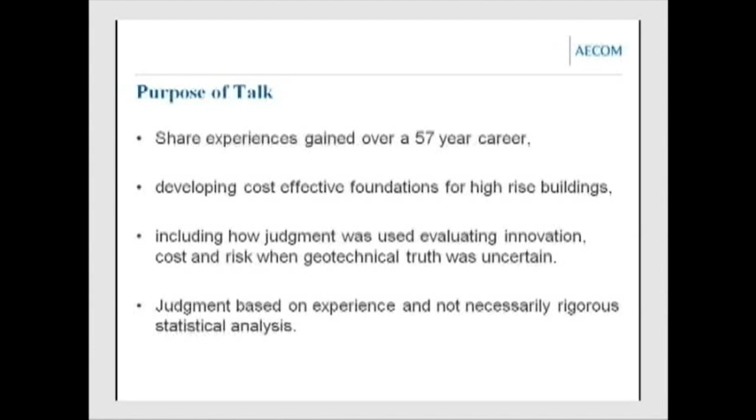Well, there it is. The only thing I could add is the judgment I'm going to talk about is based on experience and not necessarily rigorous statistical analysis. Most of you who know me appreciate that.

The major portion of my career has been spent in Chicago, and the Chicago foundation history has undoubtedly been an influence on my development as a foundation engineer. I followed Ralph Peck in Chicago and gained from Peck's experience greatly, I would say.

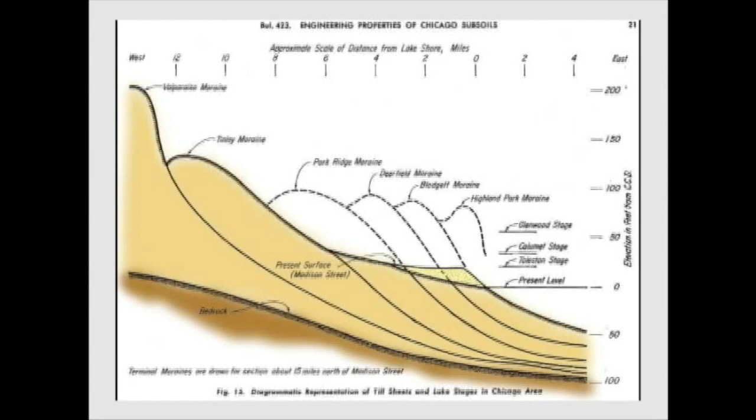I want to give a little background here, because it helps explain me a bit. Chicago is a glaciated area. We've been run over by glaciers over the last 40,000 years, maybe at least 5 times. You can see the different till sheets represented here, close to downtown Chicago. There's a sand layer over these till sheets that increases in strength with depth.

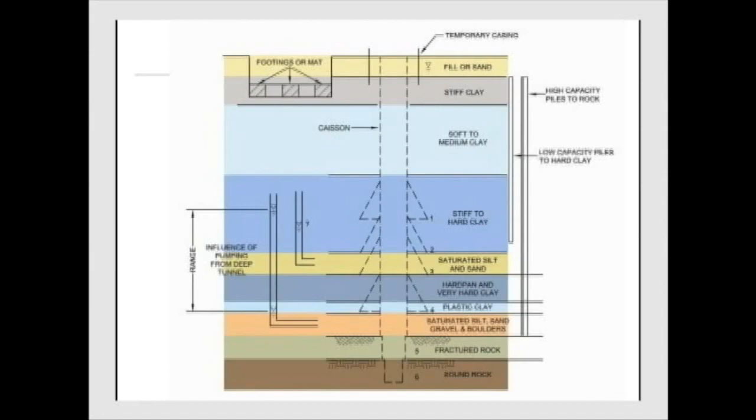Some of our buildings are rather famous for excessive settlement. The auditorium building has settled a maximum of 30 inches, with a maximum differential of 18 inches. It did it gradually enough, and they maintained the cracks, mortared them up and everything, as I understand it, so they kept it safe. But you can notice it when you visit us—you actually step down as you go into the auditorium.

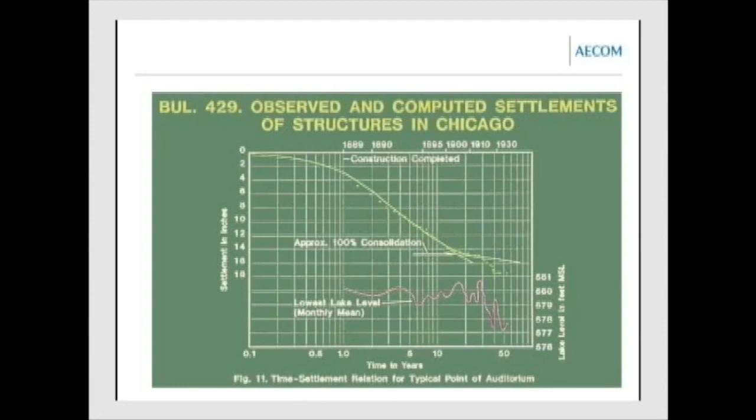This is just showing a typical point, not the worst part, not the 30-inch part, but you can see even over a 50-year period, there's 18 inches of settlement reported at this particular point.

Now, because of this settlement, builders at that time knew from experience it was going to settle. So they built them a little bit higher, 3 inches, 4 inches—I think the maximum height was 9 inches. And of course, 30 inches is a lot more than 9 inches.

General Sooy Smith developed what was called the Chicago caisson method. It involved digging a circular shaft and driving timber lagging sets, then bracing them with circumferential steel rings. You just keep going deeper. When you get down to a hard bearing level, you can enlarge it, and you can call it underreamed or belled, or whatever.

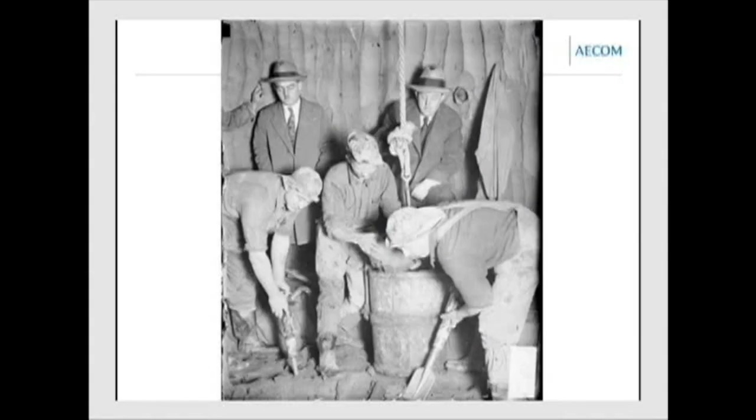Now, I love this picture. This is a picture down on the bottom of one of these hand-dug caissons. It must be a rather sizable bell. You can see the workers—I've ridden up and down the muck bucket there many times with the workers, but I wonder how those guys in the back got up and down, the guys in the suits with the fedoras. To be honest with you, I don't have the answer to that one.

Now, what they started to do is put these taller buildings on caissons down on the hard clay and hardpan. The presumptive bearing value was 12,000 pounds per square foot, 6 tons per square foot. By the way, that is still the Chicago Code presumptive bearing value for hardpan, if you can believe it.

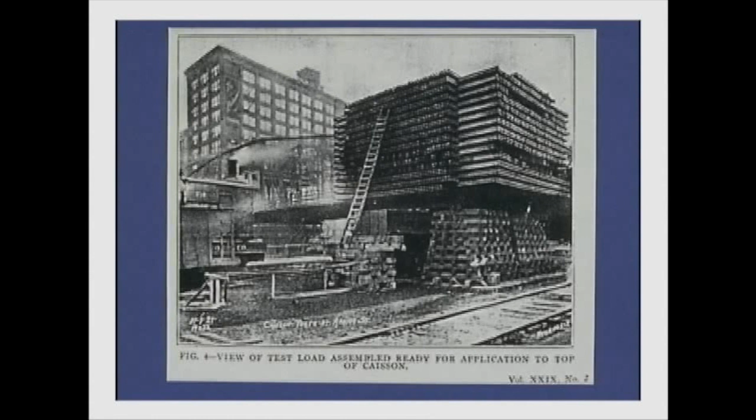Anyhow, around 1919, D'Esposito, who was the chief engineer with the Union Station, was building a head house, I guess they called it, and he decided they had better prove that the bearing pressure was good for 12,000 pounds per square foot, because that's what they were using. This was a massive load test, probably the biggest load test at that time. And in those days, you know, the load tests went on and stayed on.

This load test took a couple of months to run, and I think they got up to a bearing pressure well over 75 tons per square foot.

They were pretty smart. This was really before modern soil mechanics, but they figured some of this load's got to be being carried in the shaft. So we better dig a tunnel down underneath this thing, mine it out so there's no bearing at all, and reload it to see what is carried in friction.

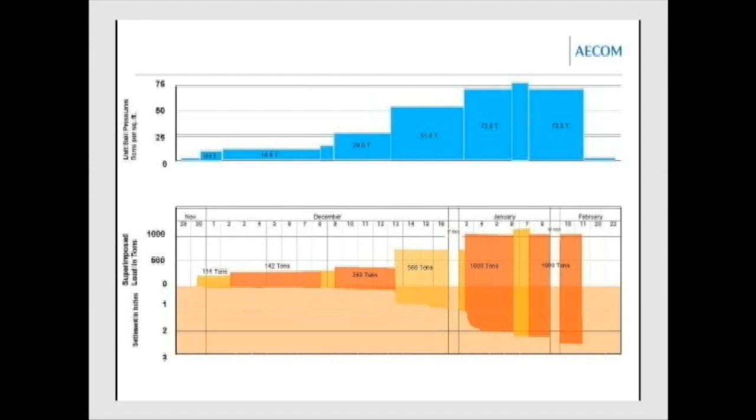So they did that, and when they subtracted that load off of the prior load, the bearing pressure they put on the hardpan without failure was 65 tons per square foot. They were trying to prove 6 tons per square foot. Now, you'd think that would have led to a rash of construction with bells on hardpan using higher bearing pressures.

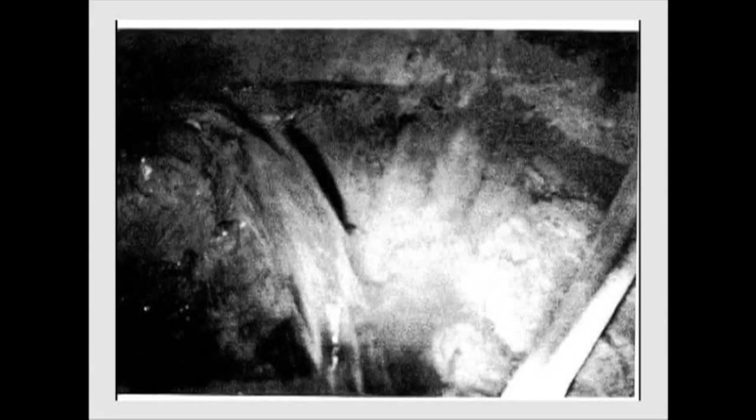Unfortunately, now you probably can't figure out what this is. I took this picture down in a shaft that was having a lateral blow-in because the shaft had gotten too close to a rock caisson, and water, sand, and silt were coming in.

What happened in those days is some owner decided, well, I've got a super important building, I'm going to put my building down to rock. And when he did that, he's pumping water, moving sand and silt, and undermining the poor guy next to him on belled caissons.

So the end result is that in Chicago's big building boom in the 1920s, when most of the 20 to 40 story structures, maybe 45 story structures, were built, all went to rock because nobody wanted to risk that if they sat on hardpan, even with a high bearing pressure proven, somebody coming along beside them could undermine them.

Now we move up to, nothing happened during the Depression, as you know, and post-Depression, post-World War II, we were still pretty simplistic. Pre-1948, the structural engineers were hardly any geotechs. The structural engineers would base their design values on the unconfined compressive strength, and so that was what it was.

You had to have the unconfined compressive strength, and that was your allowable bearing. Along with the Terzaghi and Peck book and others, bearing capacity theory got up to 1.2 to 1.3 times that if you wanted to keep a factor of safety of 3.

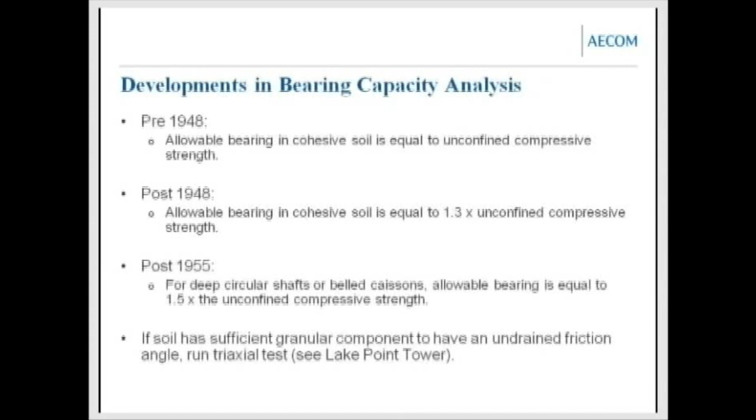Now, when you got up to the really big buildings that we started to build, Lake Point Towers, I think, was the first really big one that I recall being involved in. 65 stories, and loads were very high, and rock was very deep and very expensive to go to.

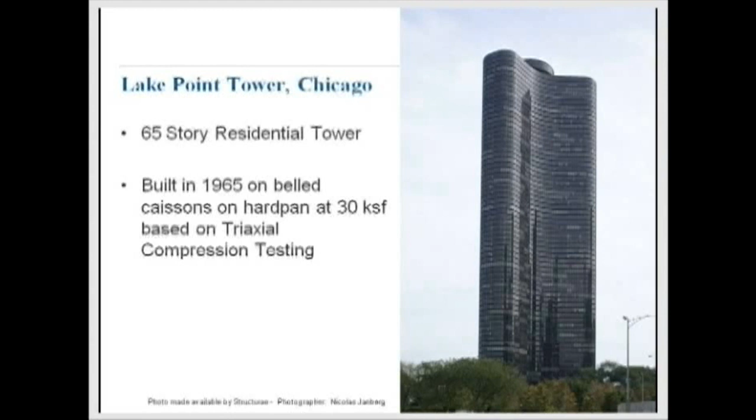So it was in the part of Chicago with the deepest depth to rock. There was big pressure to use belled caissons, and they actually wanted to use the highest bearing pressure they could. So we did triaxial compression testing, and we confirmed that you could use 30 KSF.

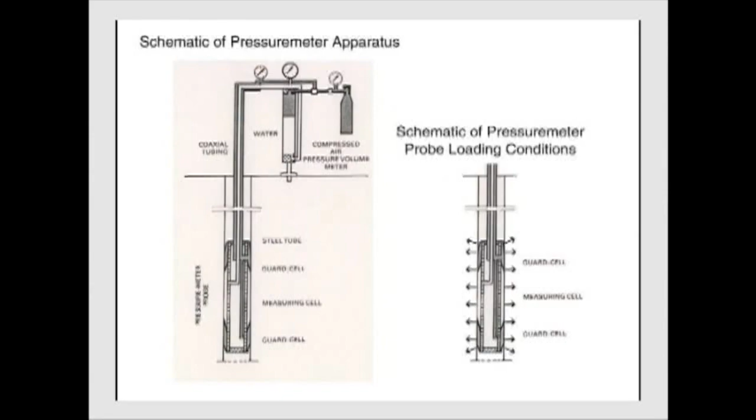And I look at it, in my simplistic way, as kind of analogous to an in-the-ground load test. You're radially expanding this probe against the borehole walls, and you're measuring the pressure and the amount of deformation. So it can be looked at that way.

Now, some of these, I've got some, this is just a drawing that shows it, and I want to show what's important to us. We use the pressure meter a lot. We have found it very successful at predicting settlement in our glaciated soils.

I'm just going to hit on the high points that we look at. We always run an unload-reload cycle at the creep pressure, and we have the best guys doing it.

They have zero creep, zero creep, zero creep, starts to get a little creep, run an unload, reload pressure, and then you go up to failure. And what we have found...

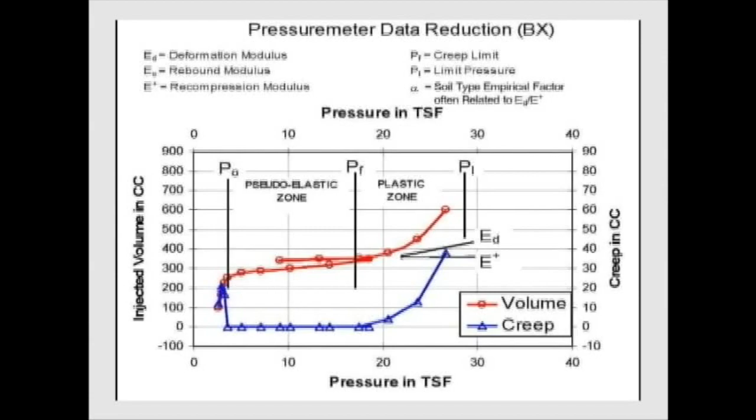The alpha that Menard uses in his table is also used in Jean-Louis Briaud's book. It's based on his experience testing all over the world, and it's okay for generic use. But we find that if we use the alpha, we have related it to the initial modulus E sub D over the reload modulus.

We have found that a very effective indicator. It varies with the soil type, and we have our own procedures. We don't use an alpha factor less than 0.5 in clay deposits, we don't use less than 0.4 in silt, and we don't use less than 0.3 in sand.

And following that, we get very good settlement prediction results. You'll see how important that is in one of the, unfortunately, few equations that I have in this talk coming up. But the rules that we use with the pressure meter, if we want to predict settlement as accurately as we have been doing in the past...

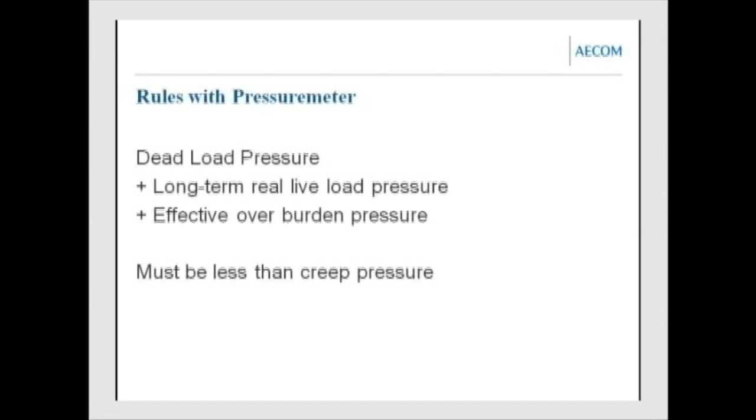Is we want to keep the total pressures less than the creep pressure. So the dead load pressure plus the long-term real live load pressure plus the effective overburden pressure, we try to keep to less than the creep pressure. And that assures that our stresses are in the pseudo-elastic range.

We have found that the creep pressure is analogous, very close to the pre-consolidation pressure of the soil. Bob Lucas, who used to be with our firm, did a lot of testing on that. Bruno Debussy from France also. We found the creep pressure to be very close to the pre-consolidation pressure, and we use that.

Now, for the settlement theories, the two approaches that we use in our sort of empirical, approximate way: we use the Menard method, the Menard procedures, which we'll see the equations for in a minute, and we also use the elastic theory, which is also approximate.

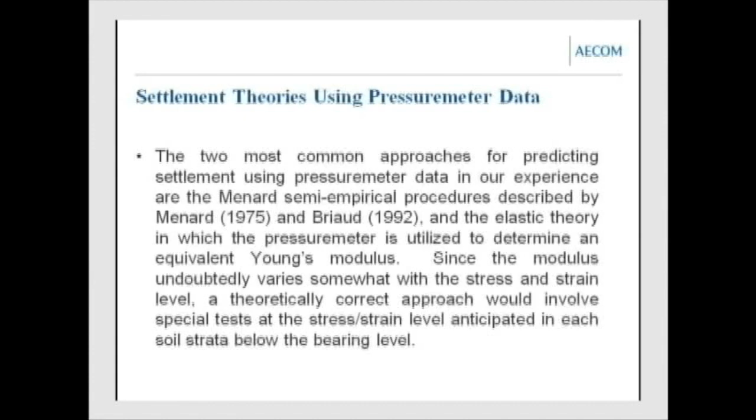There's a formula for it, and it's approximate, but it gives you an elastic theory method and then the Menard method. The elastic method, the way we use it, usually predicts more settlement than the Menard, and you'll see why in a minute.

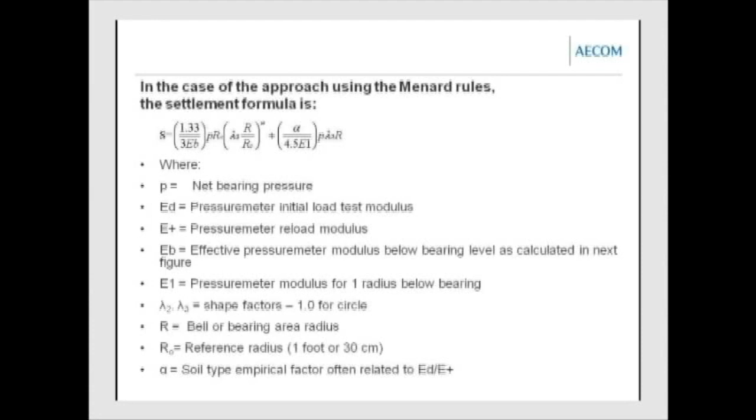And that's because of the alpha factor. If you look at the settlement equation, you'll notice that in one part of the equation, the alpha is an exponent. And you can see that if you're going to use an exponent less than 1, you're going to be predicting less settlement. So we have found it very effective, and we get much closer results using it, following the Menard rules in our glacial deposits, and we've tried to use it around the world.

Now you're going to hear why you have to relate it to your local geology. You can't use their same methods everywhere.

And this is Menard's equation for determining the E sub b, which is on the left hand side of the equation. We won't spend time on that, but it is another important aspect.

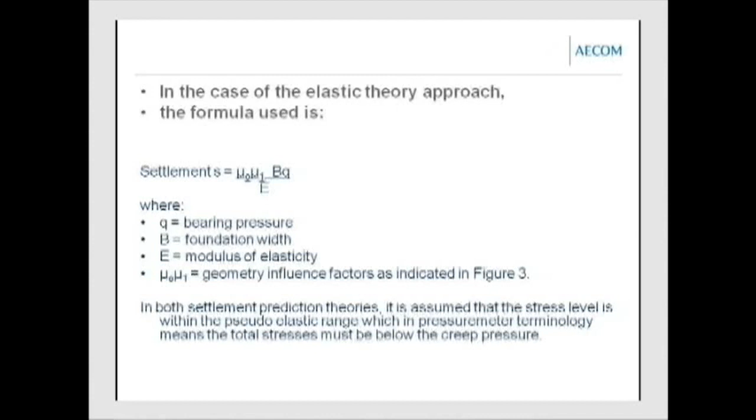And then the elastic theory. Again, it's an approximation because you're using geometry influence factors that have been developed, and then you're using an average modulus, an average E.

In both these prediction theories, it is assumed that the stress level is within the pseudo-elastic range, which in pressure meter terminology means, as I said, the total stress is below the creep pressure. And these are the charts showing those influence factors to go in the elastic formula.

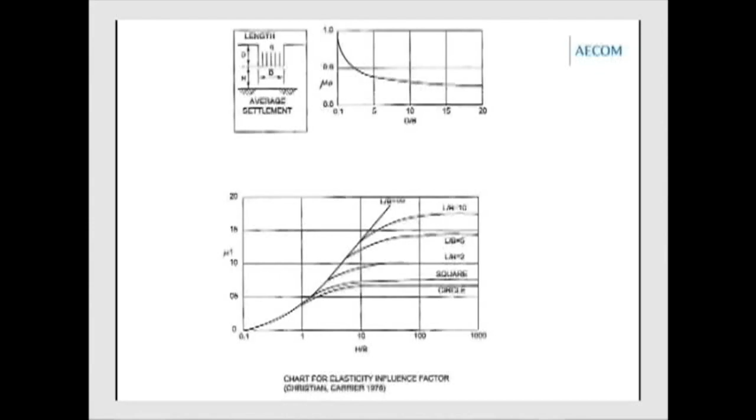Now, this brings us up to more of the current time, and what I want to talk about is the pressure today for more cost-effective foundations. Of course, we get hired because the clients think that we can help them come up with more cost-effective foundations.

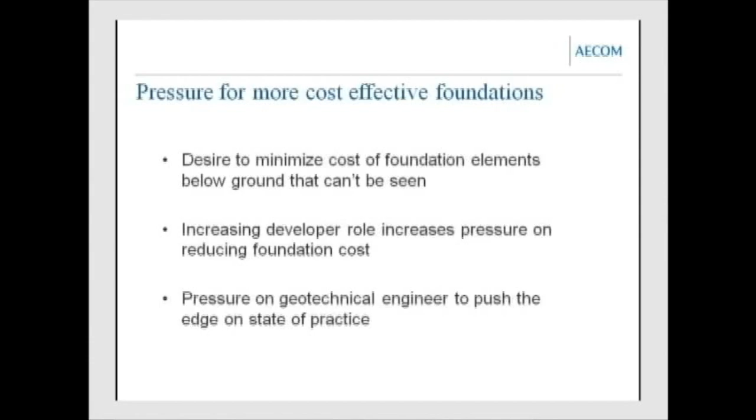The increasing developer role has just pushed that even further. Now, this puts pressure on the geotechnical engineers to push the edge in the state of practice. So we've developed some rules that we like to follow, and you'll see what's happened in our experience in one case where we didn't follow them closely enough. But in general, we've developed rules that will keep us out of trouble while we're evaluating new ideas for reducing foundation costs.

The themes I wanted to talk about are judgment required in evaluating geotechnical uncertainty and the risk involved, along with ideas for reducing foundation costs.

The first idea is maximizing allowable bearing pressure. That's an easy one: get the most out of the ground you possibly can that you're comfortable with.

Use of mixed foundation systems. When I started in business, structural engineers wouldn't consider mixing foundation systems because they didn't have the confidence—in fact, there weren't any geotechs. The structurals did their own geotech work, but they didn't have the confidence that they could predict what the settlement would be, so they didn't want to mix foundations. Now we mix them all the time.

Reuse of existing foundations, and then use of highly stressed piles as settlement reducers. I'm going to talk about two different ways here, and they're both rather unique—not as friction piles, but as end-bearing piles. Usually when you consider piles as settlement reducers, they're in the friction pile category, so this may be interesting.

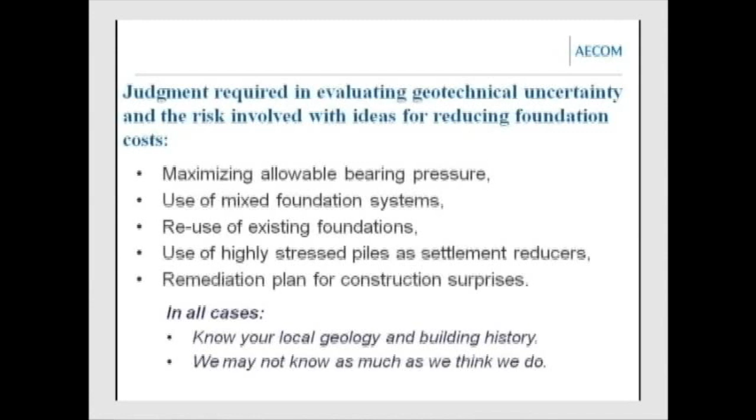Another reason for knowing your local geology and building history is that we may not know as much as we think we do. As an illustration, I'll talk briefly about what was used on Petronas Towers, and a similar parameter arrived at much differently, by necessity and local experience, on the Burj Dubai. The Petronas Towers are maybe the third tallest, and Burj Dubai is the tallest.

In the Petronas Towers case, we had hundreds of pressure meter tests—I think it was like 67 pressure meter tests, 2 full-scale load tests. Both the local geotech and we got together and arrived at a modulus based on all that data of 250 MPa.

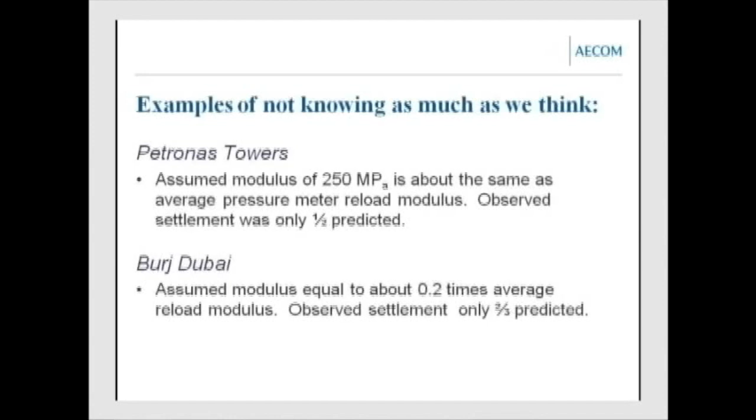In the Petronas Towers project, that was equivalent to about our average reload modulus, and that's what we've used in Chicago. We found we have to use a little higher value—if we just use the reload modulus, we're going to over-predict settlement. The ground isn't stiff enough, so in Chicago, if we want to use that method instead of the totally Menard method, we'll often bump that up to come closer to what's actually observed.

Burj Dubai, on the other hand, the local geotech had experience and did all sorts of tests—lab tests and a lot of pressure meter tests—and developed an assumed modulus about equal to 0.2 times the average reload modulus. A factor of 5 different. So you can see the kind of trouble you could get in if you used one philosophy, carried it around the world, and didn't change anything.

Now these are totally different deposits, and you have to look at that. On the Burj Dubai, very porous, poorly cemented sandstone, siltstone, that sort of thing—very low density, very porous, and very poorly cemented. On the Petronas Towers, badly folded, weathered siltstone and sandstone, weathered to very dense soil. Blow counts in both cases about the same, averaging 100 or more, but just different geology, and you have to learn to correlate what you're using to the local experience.

Because of this, we have developed certain essential requirements. If we're going to try and work at the state of the practice on a major project, there's one absolutely essential requirement: the structural engineer and the geotechnical engineer must serve as a team. They must have confidence in each other and communicate well with each other and with the architect and owner.

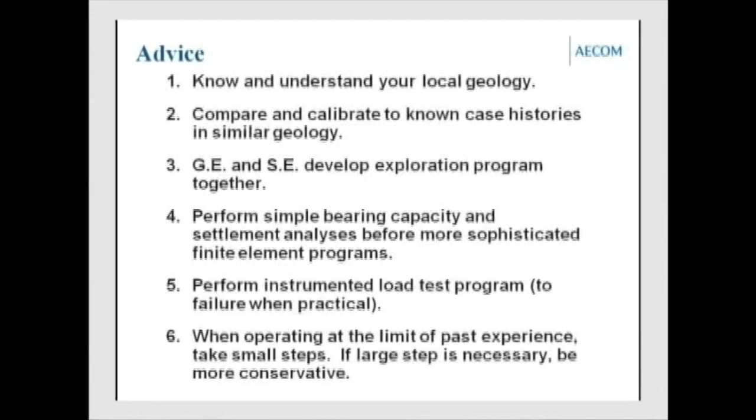And then when operating at the limit of past experience, take small steps. If you're in an area like we are, we don't increase the bearing pressures anymore in Chicago because the city knows we predict the settlement very good. They don't want any more settlement. They know if we up the bearing pressure, we're going to get a little more settlement. So they've kind of set the bar now, even though we say we could go higher, they say no, we don't want you to do that. So when you're operating at the state of the practice, you want to take small steps.

And it's always good, particularly if you have occasional surprises you have to deal with, to have a what-if plan, a plan B. What if this happens? What are we going to do? Have it ready ahead of time. Don't stop the job and have everybody pull their hair trying to figure out what to do. Have your what-if plan already there, and the contractor knows what it is, and things move a lot faster.

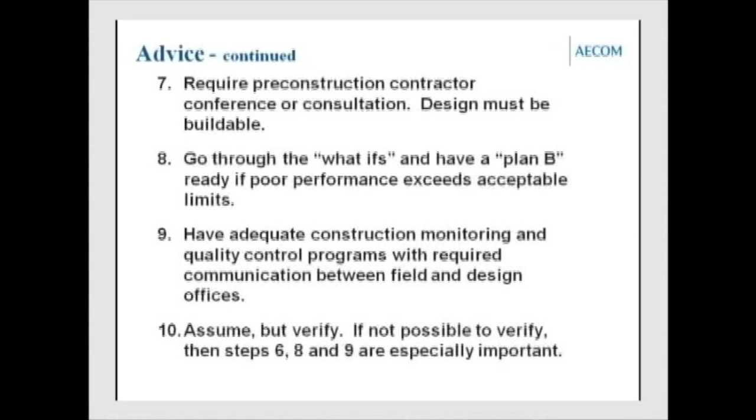And then have an adequate construction, monitoring, and quality control program. I want to emphasize this part because it's one thing that didn't happen on one of our jobs - required communication between the field and the design office. You've got to have that connection between what's being observed in the field and the design office. And then assume but verify. There's lots of things you're going to have to assume - verify them. If you can't verify them for some reason, then steps 6, 8, and 9 are even more important.

Okay, this is the case histories that we want to talk about, and they're all there. We'll go quickly to the first one.

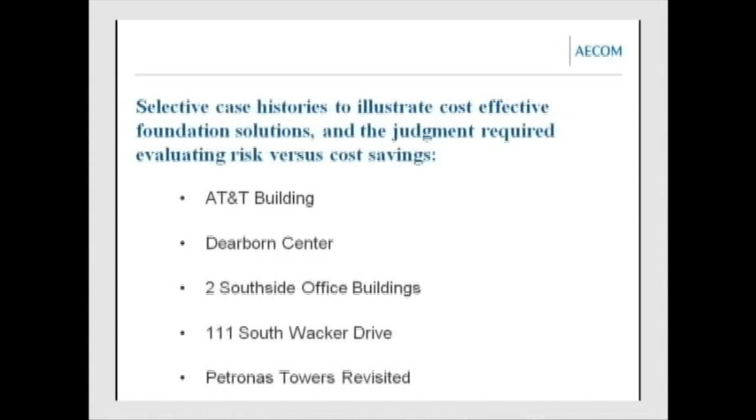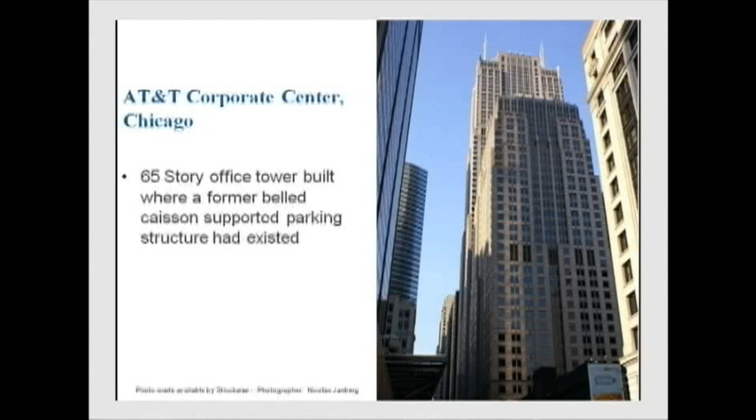This one I'm using to illustrate maximizing the bearing pressure, and there's a unique feature that helps us get to that. It's a 65-story office tower built where a former belled caisson supported parking structure had existed. This is what it looks like. It was right next door to a 10-story footing supported building on soft clay that had already settled 4 or 5 inches, rather scary by itself. And now you've got these huge caissons that have to go in alongside existing caissons that were stopped in the hardpan.

How do you get them in? Well, in some cases you actually could fit them in - there are a number that could be fitted in. But because there are a number that couldn't be fitted in, we looked at whether we had to go to rock. These were, I think, 14,000 kip column loads, so not much alternative to going to rock socketed caissons. Again, we've found in our experience that rock-socketed caissons cost about triple what a belled caisson solution would cost.

So there's tremendous pressure from the owner and developer - can't we do something other than go to rock? So this was a case where we looked at it and said, well, if we can dewater that underlying silt, that water-bearing dense silt that underlies the hardpan, if we can dewater it sufficiently so that we can go down and bell there, that bearing stratum is better than hardpan. The pressure meter test data in that stratum was better, so we said we'll design that for 50 KSF if we can dewater it.

So we had some limited success with using filtered dewatering wells to lower the water head, so that we don't have a blowout in our face when we construct these bells, we can do it. The owner and developer decided, because of all the money they could save if it worked, that's the direction we would go. Then the question is how many wells does it take - in this case we thought maybe we could do it with 3 wells. We were very fortunate because we had a very porous deposit. We knew it was porous because one of the boreholes lost 100% drilling water.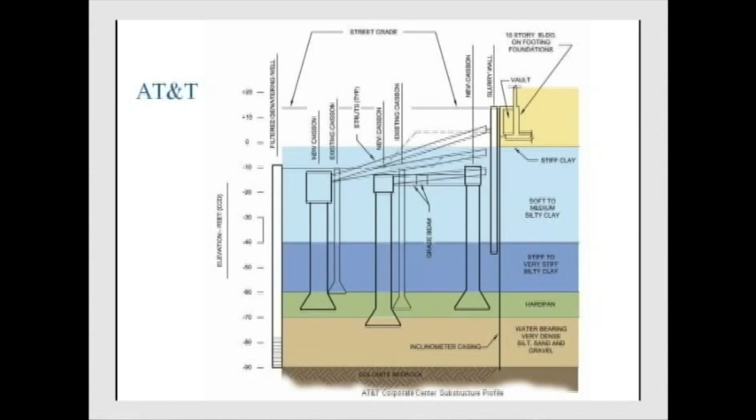That's the kind of location you want to find if you're going to use a filtered dewatering well and hope to lower the water table. You've got to get water out of the ground to lower the water table over a sizable area. You may lower the water right where you are with a little bit of water, but you're not going to lower it over a large area unless you get a lot of volume.

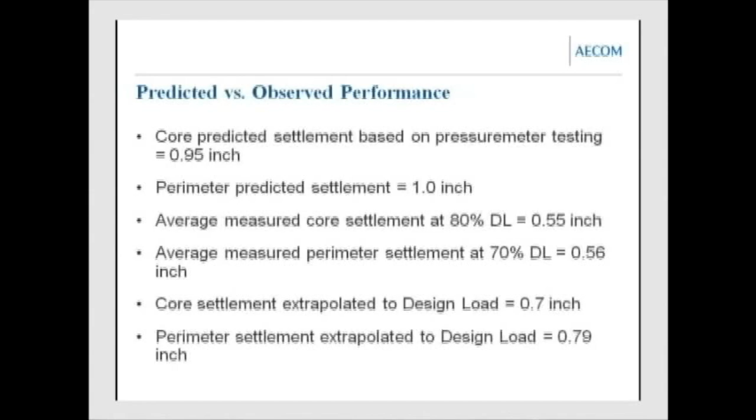So how did things work out? It worked out very well. The predicted settlement we were working with was about 0.9 to 1 inch for these caissons constructed either on the dense silt or the hard pan. They measured the settlement when the dead load was totally on, but the live load wasn't on yet, and the measured settlements averaged less than 0.6 inches. So they were a little less. If you extrapolate out to 100%, maybe they'd extrapolate to 0.8 inches, and we had predicted, based on pressuremeter testing, 0.9 to 1 inch. So everybody was very happy with the performance, and obviously the dewatering worked.

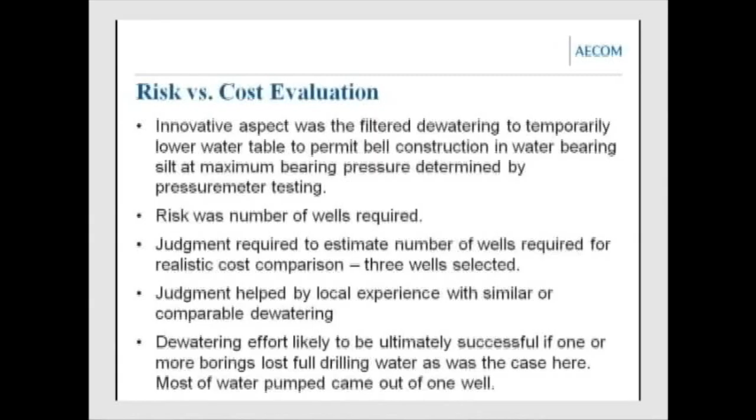Risk versus cost evaluation. The innovative aspect here was the filtered dewatering to temporarily lower the water table to permit bell construction in water-bearing silt, at a maximum bearing pressure determined by pressuremeter testing. The risk was, one, that it wouldn't work at all, but also, even if it worked, the number of wells required, the judgment required to estimate that number for a realistic cost comparison. Here we had to make that judgment call, and we picked 3 wells, because we knew we had a permeable deposit. If we could get water out of it, we'd had enough experience in Chicago that if you can get water out of the deposit, you can lower the water table for several blocks around your site.

This is what should make you proud of something. I'm kind of proud of this one. You look at it and say: a 38-story office building built on bell caissons that had supported an 11-story building. Then you might ask, how on earth could you put a 38-story building on a caisson foundation for an 11-story building? Is it super light? No, it's a normally heavy structure. So how did you do it? How did we do it?

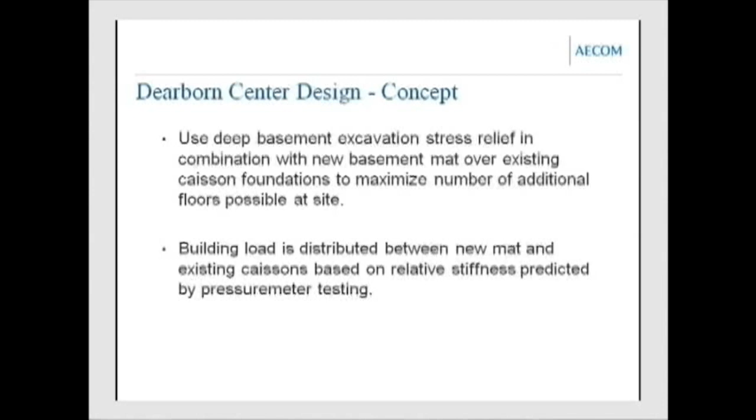Well, we thought about it, and we used the fact that it had deep basements, I think 3 or 4 basements, down about 37 feet. We realized that when they made that excavation and took all that soil out, the soil below that level was pre-consolidated at least to that level. So we put a mat on that old slab, on top of those existing caissons, and we shared the load between the mat and the existing caissons. We ought to be able to really increase that capacity.

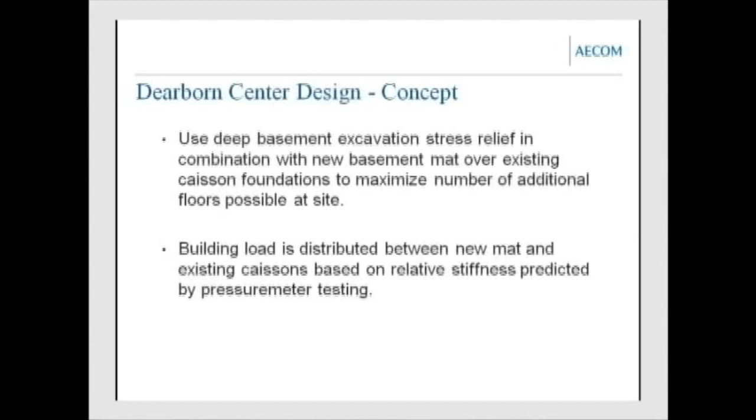And the question is, how high could you go? You've got all of that excavation, now you've got almost 40 feet of overburden around you. We calculated what the settlement would be at the creep pressure for the existing caissons, because we didn't want to go much over that, and it was about 1 inch. So we based everything on about 1 inch settlement. How much load could you put on the mat by itself, without the influence of the existing caissons, and only get an inch of settlement? In a simplistic way, you have to do some adjusting for overlap, but basically you take what the mat can carry to produce an inch settlement and what the existing caissons can carry to produce an inch settlement, put them together, and it was a 38-story building where you only had an 11-story before.

The existing caissons were designed for 16,000 pounds per square foot. Now, granted, it was built a long time ago, and I was surprised—that's what we calculated based on the load we were given. They should have only been designed for 12,000, because it was built back in the 12,000 pounds per square foot days, but we calculated it was about 16,000.

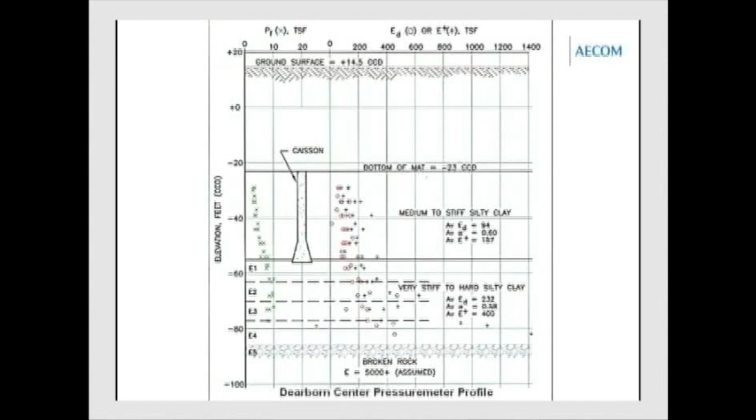You can see the modulus values below. Those are maybe 2.5 to 3 times the modulus values in the medium to stiff clay that's supporting the mat.

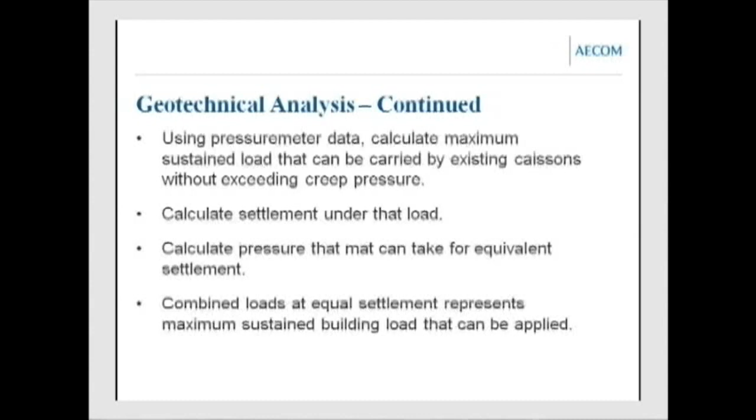How do we do it? Well, I already said it, but I'll say it again. Using the pressuremeter data, calculate the maximum sustained load that can be carried by the existing caissons without exceeding the creep pressure—that was a settlement of about 1 inch, remember. Calculate settlement under that load. Calculate pressure the mat can take for equivalent settlement. Combined loads at equal settlement represents the maximum sustained building load that can be applied. That's a simplistic story, but basically that's it.

And so you knew you were going to have significant differential settlement. So we had given the structural engineers some spring values based on the properties of the soils, which he put into his mat program, and he said, well geez, I'm going to have to stiffen this thing up. He couldn't stiffen it up by increasing the mat thickness because he needed all the space for the car parking. So he stiffened it up using those walls, and he did it in such a way that he could still use cars and things like that. I thought that was fairly ingenious of him to come up with a plan that he didn't have to thicken the mat.

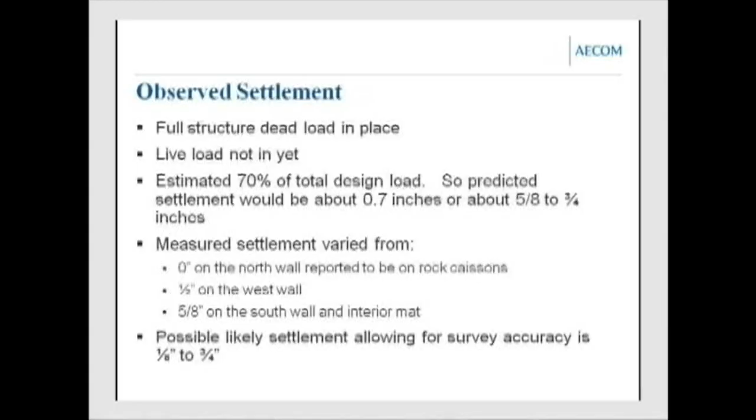Risk versus cost evaluation: the principal risk was under-predicting settlement. Existing caissons would be pushed into the ground with pressures exceeding the creep pressure, making them like settlement reducers. Suppose the mat—there wasn't that much resistance for the mat—all that building load just pushed those old caissons into the clay. Then they would have exceeded the creep pressure, acted like settlement reducers, but the thing wouldn't fail. So all we would have is just more settlement than we predicted, which would create a problem because of the rock caissons. We're darn lucky that it behaved like we predicted and not worse.

Or then we would have been stuck with what I would call—what was your plan B if you were wrong? Well, you'd have to go in there and put in some micropiles. We'd get micropiles here at the right places, or maybe more stiffening walls. You'd have to spread out that differential settlement.

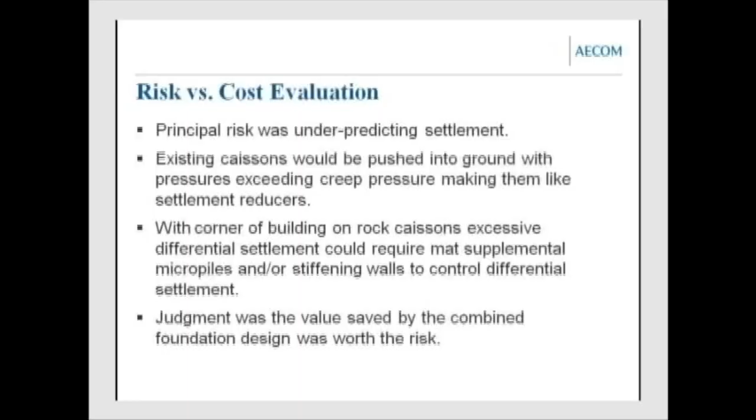The judgment was that the value saved by this combined foundation design was worth the risk, and everybody was very happy with the way the project turned out.

Now we come to two value engineering projects, not so big, just barely making the high-rise criteria, which we set at 12 stories in our town. This first one is supposed to be 12 stories, actually built 10, but you can see where the top two were planned. The second one is actually a 20-story building, I think.

In this first one, there was an initial geotechnical engineer who had done the investigation and observed there's no hard pan here, and he was right. He said if you use footings, because it's very soft clay in this part of town, you'd get 8 to 10 inches of settlement. The owner wanted to use footings because there was a nice dense sand layer on top of the soft clay, and smaller buildings would work fine on that sand layer. So why couldn't he do that?

We got called in. The structural engineer recommended to the owner that we get called in to look at if there was some other way to reduce the cost, because the project was budgeted on either footings or bell caissons. That's the way they had budgeted it, because that's what they were expecting. Bell caissons couldn't work because there wasn't any hard pan, and the footing situation gave too much settlement.

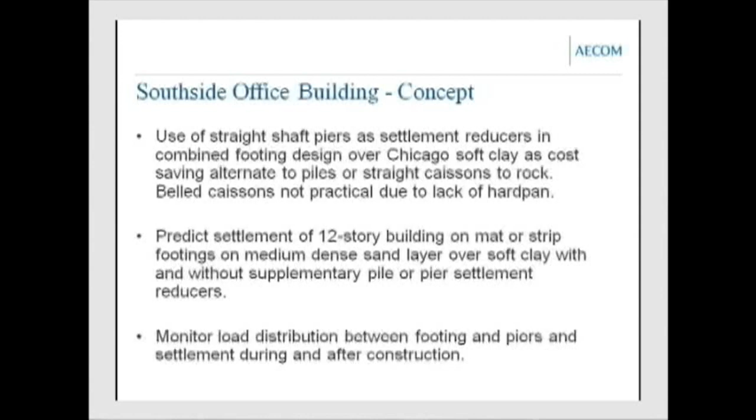So what kind of settlement would we get if we used straight shafts down to the dense silt under each of the columns? We predicted it would reduce the settlement to 2 to 3 inches. That would be using much higher load on that dense silt than the allowable would ever be, but we weren't using them because they were necessary for safety - their only purpose was to reduce the settlement. And we had calculated a factor of safety of just about 2 for the footing foundation case by itself.

The nice dense sand layer - I think the next slide may show it here. Yeah, the dense sand layer, there it is. The medium dense sandy silt, and then a stiff, very stiff clay crust. So you've got quite a thickness there before you get to the soft clay. So we had calculated about a factor of safety of 2, which in our approach meant that we could design these shafts as settlement reducers.

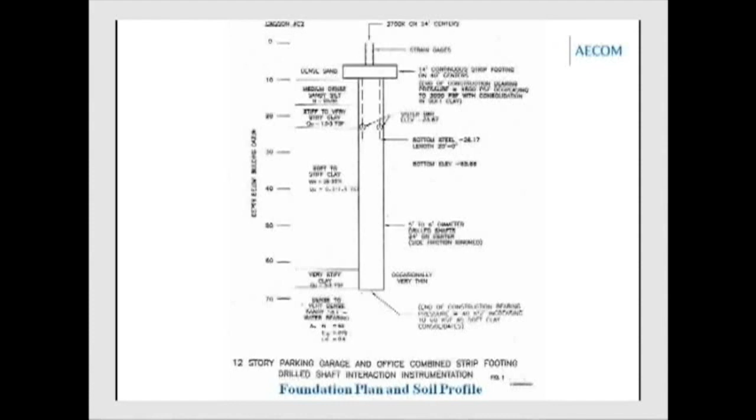The only problem is, if you're going to use them as settlement reducers as bearing piles rather than friction piles, it depends how they're going to behave in bearing. That's very important - you don't want a sudden failure, collapse, boom. That changes everything. So you want strain hardening, not strain softening. With the dense frictional material, it doesn't drop off in load - you may push it into the ground, but you actually get increased resistance as you push. So we weren't concerned about exceeding the creep pressure and maybe pushing those piles further into the ground - they weren't going to suddenly lose their capacity. Now if it had been a hard clay, where you exceed the capacity of the clay, you could have a sudden drop off. So you've got to be careful if you want to use this concept that way.

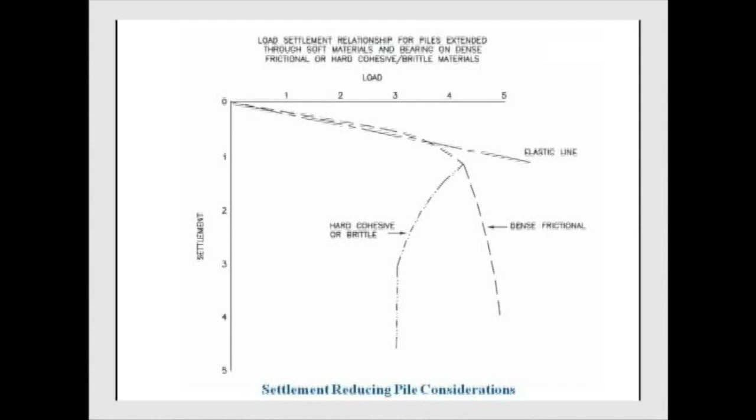Now, in another project later on, you'll see a case where we used steel piles to rock as settlement reducers. It's a case where we were very confident, because you're using a high yield steel, so you can take quite a bit of compression to get those values up there. And for reasons we'll see, we felt that would work.

Additional requirements for use of piles as settlement reducers. We already mentioned the factor of safety of 2.

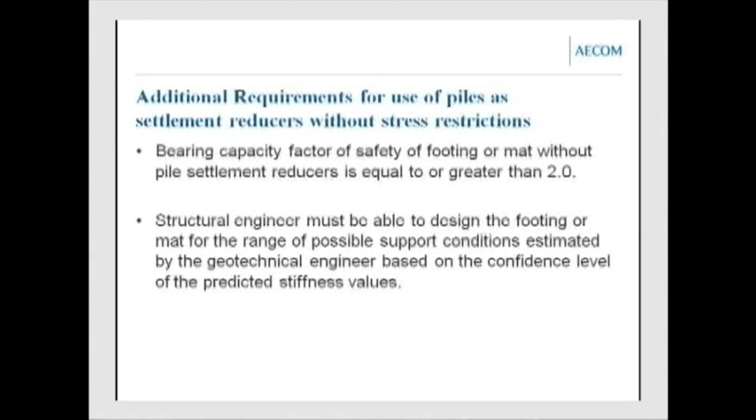The other thing is, because you may not be exactly right in how you think the load will distribute, share the load between the footing and the straight shaft, the structural engineer must be able to design the footing or mat for the range of possible support conditions estimated by the geotechnical engineer, based on the confidence level of the predicted stiffness values. We worked with the structural engineer before, and together on what range he should use, and that's where confidence in each other is important.

Now, because we only had one boring with pressure meter testing, I said we can't just base it on one boring, and we had a problem getting more for cost and time reasons. So we attempted to correlate the pressure meter data with all the standard penetration test data we have in this zone. The standard penetration tests in the boring with the pressure meter were higher than the average standard penetration tests in the deposit.

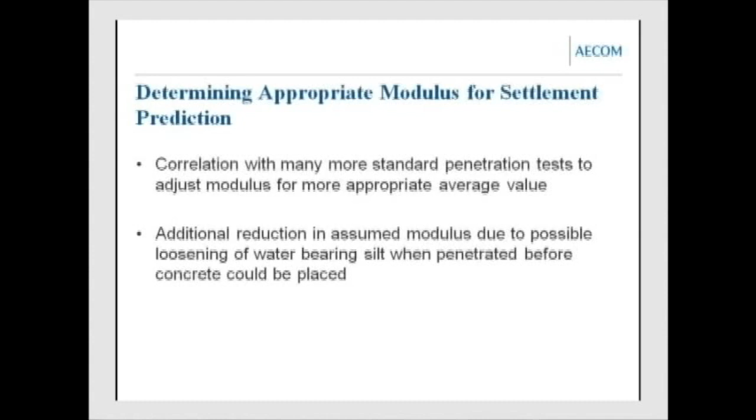So we used the standard penetration test as an indicator, and backed down the pressure meter values to be consistent with the average across the deposit. Then, in addition, we backed it off a bit more - this was a judgment call on my part, to allow for some loosening, if we couldn't get the concrete into the hole quick enough and it didn't tighten up totally when they put the concrete back. We estimated what that loosening was.

It worked out very well. It worked out better than we could have anticipated. In fact, we probably did not have to do any reduction in the pressure meter values at all. We would have been right on what we predicted, 2 to 3 inches of settlement, if we hadn't reduced the pressure meter values. The actual settlement, this is after 4 years, and there's an interesting feature I'd like to mention.

Column B6, we instrumented 2 columns, B6 and C2. B6 is at the end of a footing, and C2 is in the interior. C2 is more heavily loaded, and normally you'd expect it to settle more. But the end column, more lightly loaded, settled more. If you think about it, it makes sense, because the end column only got footing support on one side, not the other, while the interior column had footing support benefit in both directions.

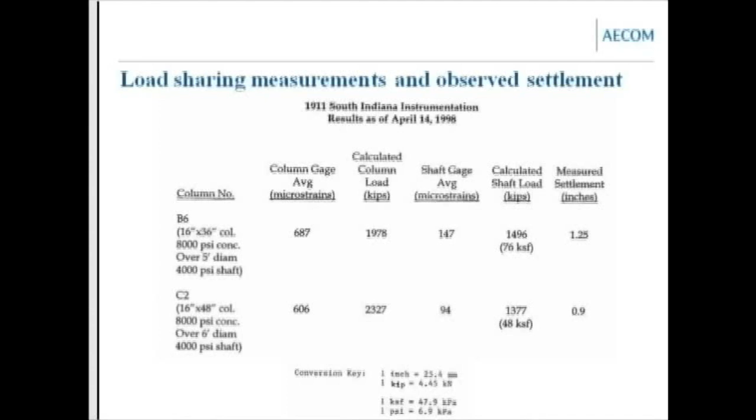As a result, at the end column, the bearing pressures below went up to 76 KSF in that dense silt. At C2, the interior one, where settlement wasn't as much, it only went up to 48 KSF. But in both cases, it's well below the 2 to 3 inches we had been basing everything on. Even when you add 2 stories - there's only 83% of the load on now, so you've got to project these up for the added 2 stories - they still haven't put the added 2 stories on, however.

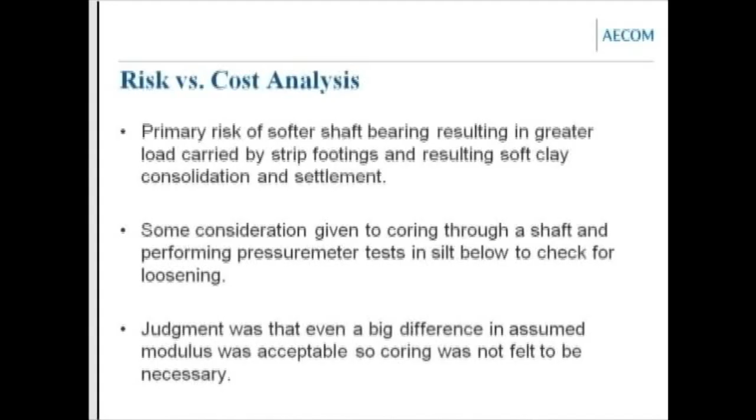Now this is the one I wanted to tell you about, where... you don't like to tell it, we expose our dirty linen, I suppose. But on the other hand, you should share your experience so everybody can learn from it. This is a case where it didn't go as we thought, where we hadn't followed all of our own guidelines as well as we should have. I was really involved in this one, so I've got nobody to blame. Let's see.

This was a value engineering job, an idea from the contractor. We were called in after the original geotech plan was to go to rock socketed caissons, which was a big price. The contractor came along with a value engineering idea: I can save you a bundle if we just go down a straight shaft to the top of rock. Instead of using 100 TSF, the code allowable for sound rock in Chicago, if we just go down to the top of rock, we'll cut it in half and use 50 TSF, straight shaft. He came up with a price that really attracted the developer.

So we were called in to validate it. Is it possible? We said, well, if we do pressure meter testing on that interface, we may be able to verify 50 TSF to the satisfaction of the city. The city is the one that had to be satisfied, because there's no code provision for sitting on top of rock. As my pile friends would say, if you'd driven piles, every pile is a tested pile, you'd know what you had. But in this case, you're sitting on the surface of the rock, and you don't have any code allowable. So we did the pressure meter testing at the interface, and satisfied ourselves that if you got down inside the surface of the rock, 50 TSF had a factor of safety of at least 2, which satisfied the city, and the project went forward.

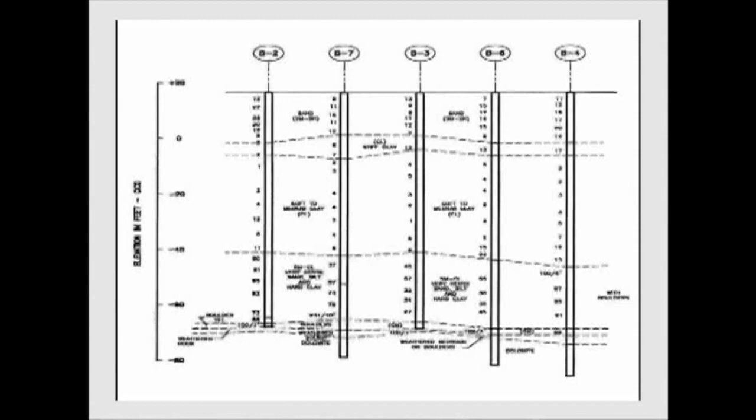Now, if you look at this, these borings are all around the perimeter, and it looks like everything's flat line, right? In the next slide, there was a building in the way in the center of the site, so no borings were ever taken in the center of the site.

What happened was, we had a new caisson inspector who'd never done a slurry caisson before, since these shafts were all done under slurry. So I went out the first day and showed him what to look out for. The caisson contractor had done slurry caissons before, so we were working with an experienced contractor.

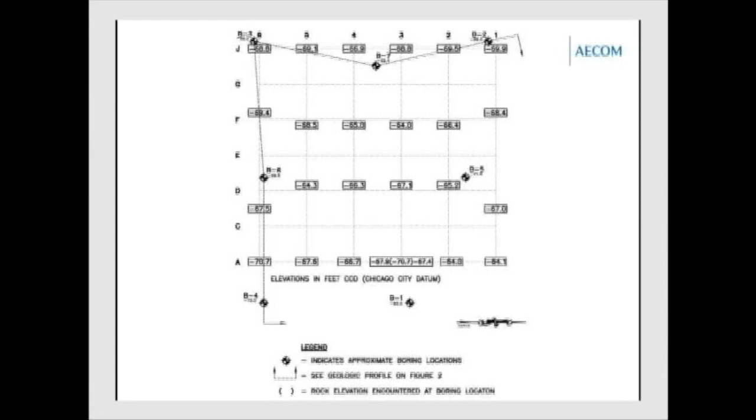We didn't have a mini SID like you have down here. We do it by sounding, making sure that the muck bucket has cleaned it up enough. I wish they'd used an airlift, but they do it with a muck bucket, and you can sound with it. If the sounding thing sticks, you haven't got enough of the stuff removed. Anyway, we followed the procedures that we had been successful with in the past.

The only problem is the contractor had given his estimate on the assumption that auger refusal would be the surface of rock. In the first two shafts out there, fortunately we had borings near them, and we weren't down to the rock yet. So the contractor agreed: okay, yeah, well, I know we got to get to the rock. We'll put on a rock auger and switch to it, and go until we're close to the right elevation based on the adjacent boring.

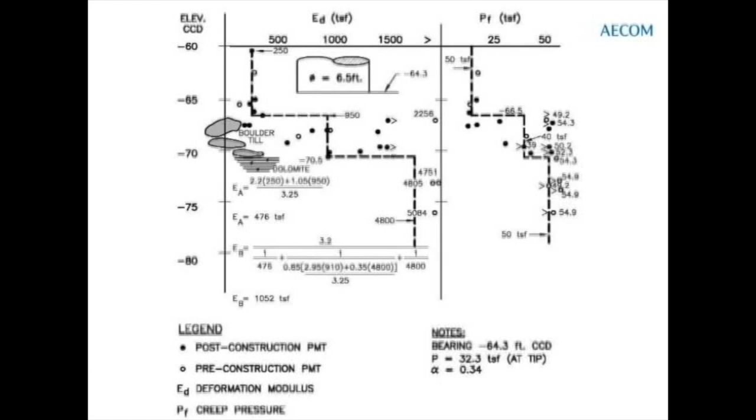For the two shafts I was there for, that required 20 minutes of rock augering. So I told the inspector, follow the same procedures on the rest of this job. Make sure they don't try to stop with just auger refusal—they switch to the rock auger and grind away for an additional 20 minutes. If they get 2 to 3 feet deeper with the additional grinding, that should be okay.

I didn't hear from him until almost the end of the job, and he called in. I asked, well, how'd the job go? And he said, hey, the job went fine, except as we moved over into the center of the site, the rock seemed to rise, and the shafts got shallower and shallower. I knew immediately that something's wrong, because I knew the area pretty well.

It just wasn't likely. Fortunately, the quality control program we had set up—and here's where you can catch things with a good quality control program—allowed the geotechnical engineer to pick 2 caissons to core all the way down through, to make sure what you got. Obviously we picked the two shallowest ones, the ones that stopped shortest, and they cored it, and they were 5 foot above rock. What had happened is there were boulders there, and they hit some boulders sufficient to even stop their rock auger, with only 20 minutes of rock augering. Now they tell me that now they've learned.

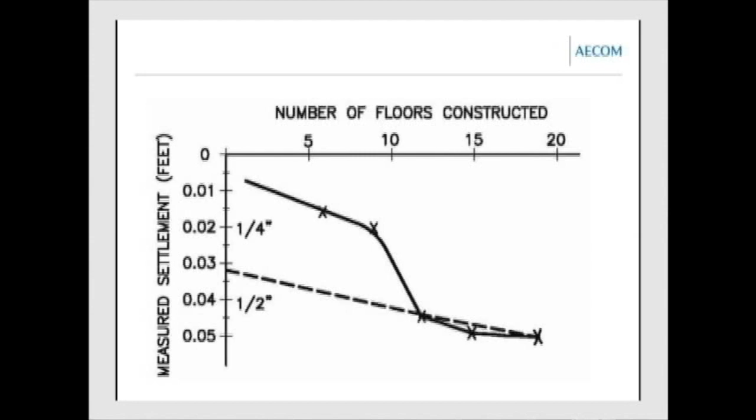The city let us go forward like that, and it worked out pretty well. This is a picture of what it looked like, the settlement. The first 9 floors, we figured very little settlement is what's being carried in friction. From 9 to 12, there's a drop in it, and we figured that's because we didn't have the mini-SID, or we left a little stuff in the bottom that's squished, and so there's your squish. Now you're bringing your boulders into contact, boulder to boulder. Stress path goes down through the boulders to the rock, no more settlement. So from 12 stories to 20 stories, there's hardly any settlement. So in the end, the project worked okay. It stayed out of court. I don't even want to talk about settlement because it's a happy history, and it stayed out of court.

What were the risks and important lessons? Well, things are not always what they seem - that's a good one for my inspector and me. Incomplete communication between the field and office can lead to major problems. A normally adequate subsurface exploration program may prove insufficient for a changed design based on value engineering. I would say we probably should have done the center boring there in any case, but certainly for the changed value engineering design.

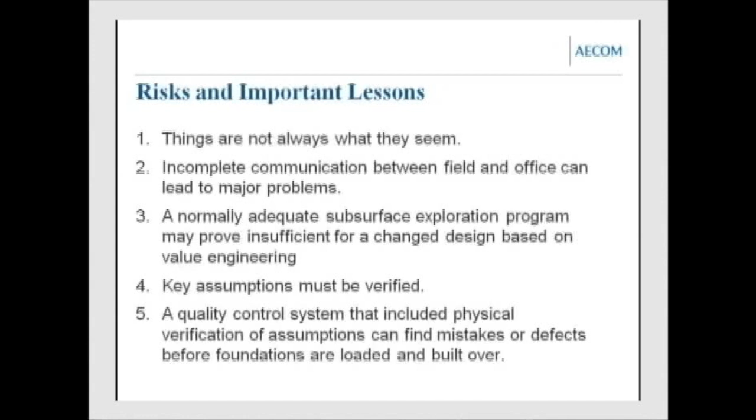Key assumptions must be verified - it's one of our things. And the good thing, a quality control system that included physical verification of assumptions can find mistakes or defects before foundations are loaded and built over. I would also add that getting a principal involved right away, so decision making can go quicker, and the client thinks he's getting the top information he can, helps avoid liability problems.

Now this is the next to last case history. This is a case history that has everything, all five things: maximizing the bearing pressure, mixing the foundations, use of piles, use of existing caissons, use of settlement reducing piles, and a remediation plan.

It's built on a site where we were the original geotechnical engineers 40-some years earlier, at least 40, almost 50-some years earlier. That was on belled caissons. At that time, the design bearing was before the pressure meter. We came up with a design bearing value of 16 KSF for those belled caissons.

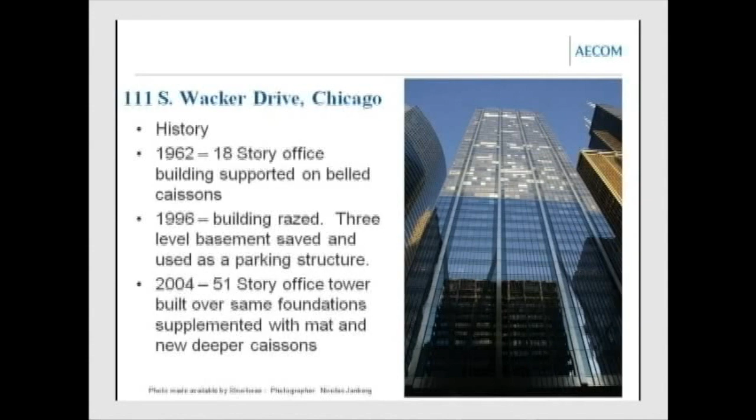But the key is, can you predict performance? Can you predict how the upper level existing caissons are going to deform? And can you predict how the higher capacity caissons are going to perform?

So it was supplemented with 14 micropiles, and those micropiles we did not have to load test. We were able to convince the city that we were using those micropiles as settlement reducers. Based on the high yield steel, they could settle a couple of inches and still carry load without failure. So we convinced them that they didn't need a load test, and you'll see when we look at the settlements that everything was almost as predicted.

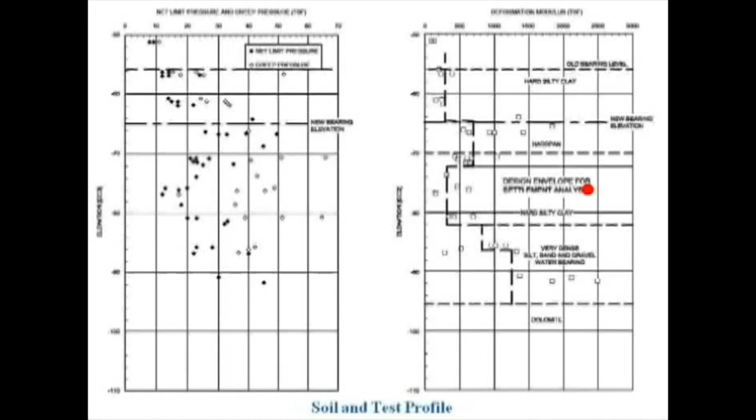I think the primary principal on that project is here. Bill Alton, who's our top guy now, he was the principal on this project. So if there are any questions, you have to ask Bill.

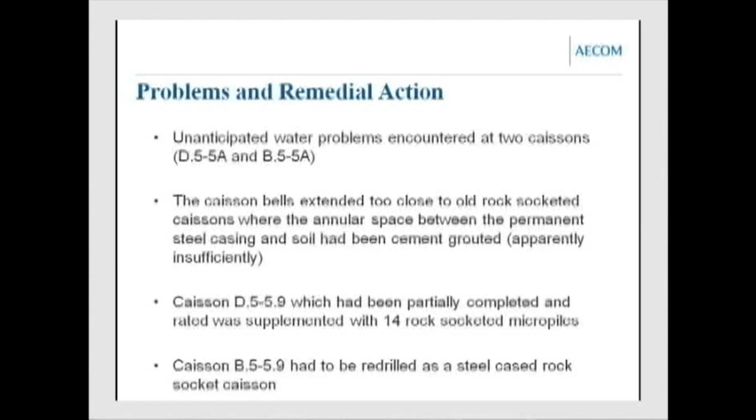Let's see, what are we up to? Okay, problems—well, we already talked about the remedial action that we did, and that seemed to work well. The settlement prediction and performance: the elastic settlement theory was a little bit more than what we would predict using the Menard's method, but they were all reasonable, all pretty close to what was actually measured.

In fact, the one place where the measured settlement actually was greater than the predicted settlement was the isolated caisson that was converted to a rock-socketed caisson. The only explanation for that—let's see, which one is that? That's this one here. The only explanation is there must have been a seam or something, because you wouldn't expect the rock-socketed one to settle anything like that. So there must have been a seam there.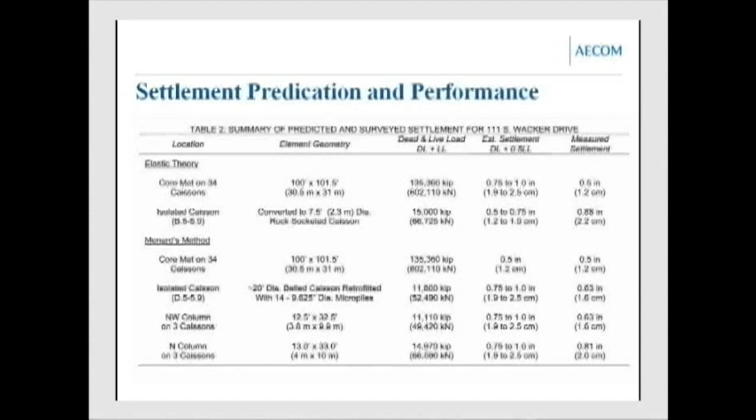But the others, the Menard's method for the core mat, predicted settlement of 0.5 inches, measured settlement 0.5 inches, and all of these are pretty close here. Here's one that's predicted quite a bit higher than the measured, but all in all, not bad. So this one ended up being a very successful case that really covered all the bases I was talking about tonight.

I'm going to get to the Petronas Towers Revisited. This is the last one. I added this because I wanted to revisit it, look at it again. One of the questions I've had is, how could we have over-predicted settlement so much when we had so much testing? That was one issue I wanted to look at. The other was, as I was looking at all this data again, I had an idea for saving millions of dollars. I think I'll throw it out. Saving millions of dollars, everybody's interested in that.

So we'll look at how come it settled so much less than predicted, and we'll look at the money-saving idea, saving millions of dollars.

This was a very challenging job. I love this picture. You can see it was, at the time, the world's tallest building. They never found the bottom here. This is over 200 meters deep. It's limestone, karst topography, limestone with cavities. You here in Florida, you know all about limestone with cavities.

I can include it in our theme here with the concept that this required a remediation plan up front, not after the fact, but up front. We had to remediate this so we could put these towers here, and the criteria was no more than a half-inch differential settlement across the mat, from one side of the mat to the other. Everybody agreed that would require doing grouting.

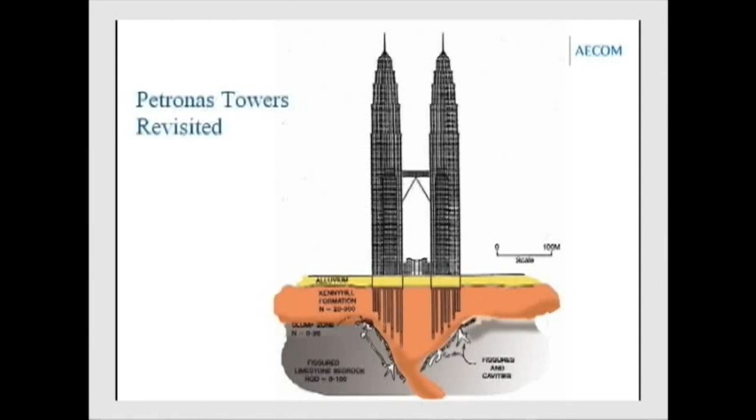Then the question is, how deep do you grout? Well, the textbooks would tell you that when you get below the point at which the new load is less than 10% of the overburden pressure, the stress effects are insignificant, or something like that. We decided we'll be twice that conservative. We will grout until the theoretical stress increase from the structure is less than 5% of the overburden. So that required going quite deep into the limestone, and we grouted enough.

The total volumes were quite impressive. Under Tower 1, the total volume of grout was the equivalent of a 1 meter thick mat—that's the total amount of voids under that entire mat. 1 meter thick total grout. So we're glad we did it.

Just a nice picture, that's fun to walk through right there. Those of you who know about it, one end of that connection telescopes into the building, so when the buildings go like this, one end is free to flex.

Here we go—well, we've already talked about this. Oh, that's interesting: world's deepest ground improvement, up to 530 feet. We grouted. That's pretty impressive.

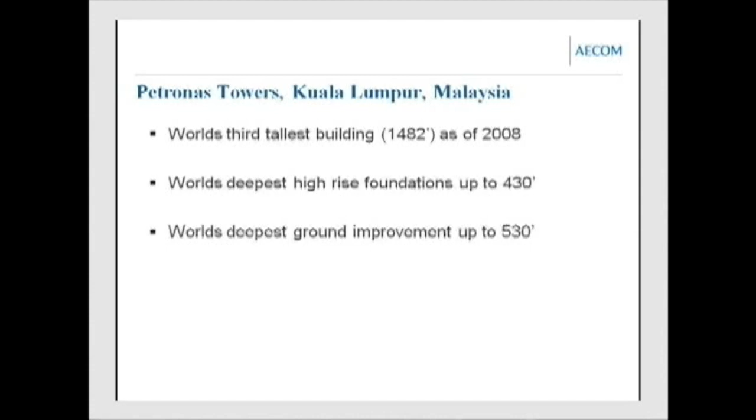The design concept was using variable length piles under the mat to minimize the critical differential settlement. We had to predict the settlement based on the modulus values, based on the bored pile load testing and extensive in-situ pressuremeter testing. We did simple equivalent footing approaches before we used the finite element program. We also planned to monitor the settlement load distribution, which did happen—it did get monitored.

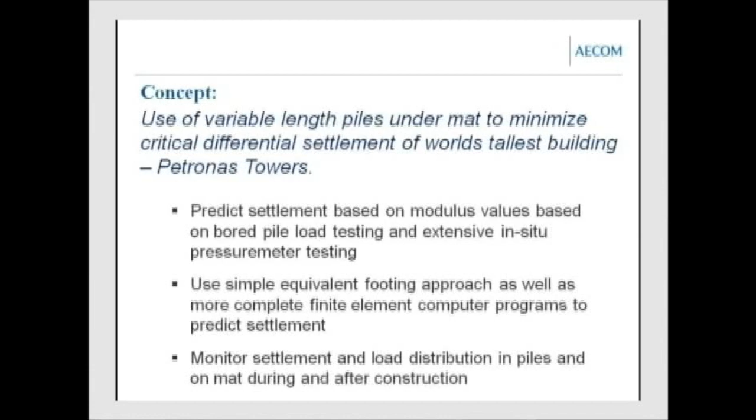Now, the equivalent footing—you might say, why would you use the equivalent footing approach here when you've got sloping rock like that? You really can't, well, you can only in the sense that you get an approximate average settlement value. We did do it, we used the equivalent footing approach.

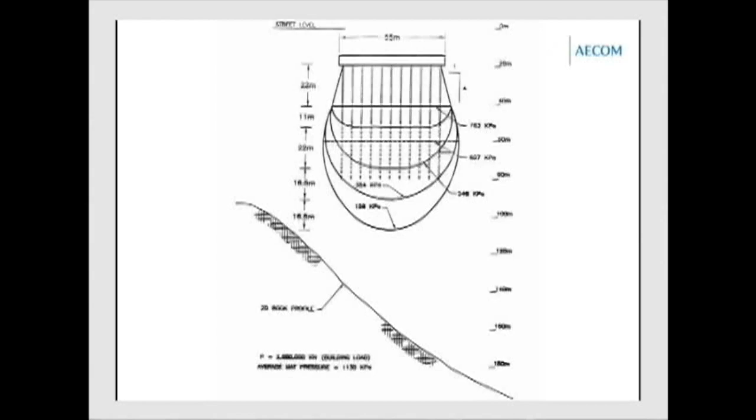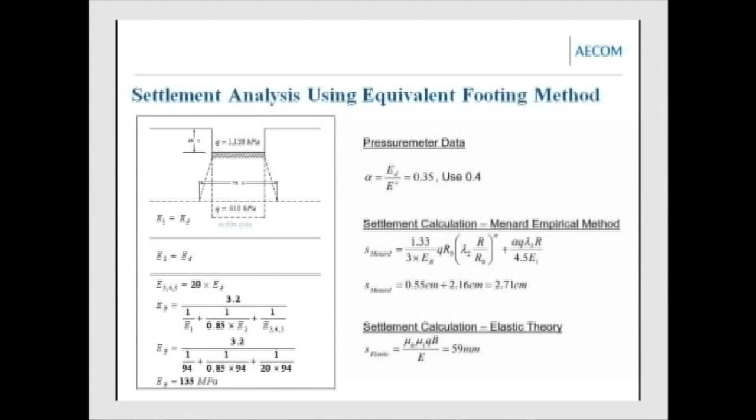We also calculate an average approximate settlement. Sometimes, though not in this design, we've looked at this as a rigid block, with perimeter friction and bearing under the block. In hindsight, if we'd analyzed it that way, using a friction value with a factor of 1.5 to 2 reduced to allow for creep, we could have been right on the money. But you can always do a hindsight calculation that gives you the right answer. We're running out of time, so I won't show all the calculations here.

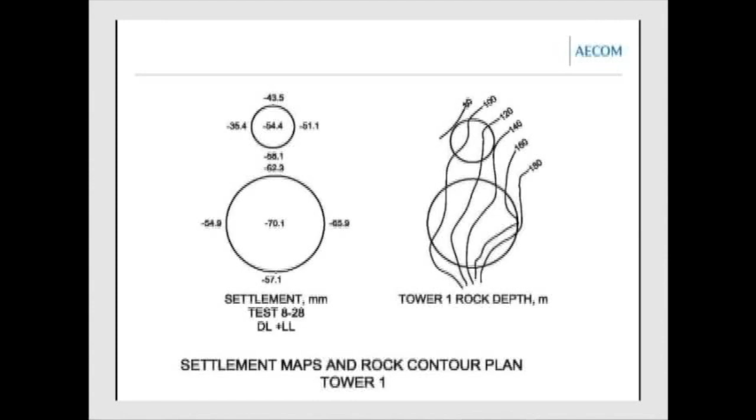Here's the finite element program with a maximum settlement of about 70 millimeters. And here's the observed settlement: about 30 to 35 millimeters, half of the predicted settlement.

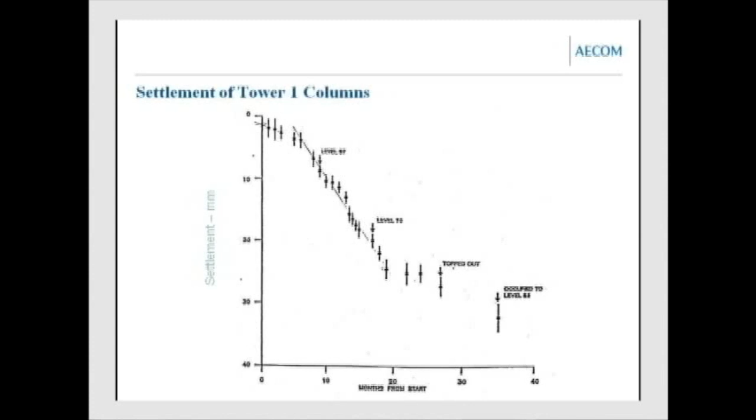So one question is, what explains this? In the original papers, we speculated that the hard layers, since this is weathered rock with relic rock structures, have a bigger influence than you get just from pressure meter testing. That seemed like a possible explanation. Another is a pre-stress effect from the barrettes installed before excavation, which wasn't considered—and the settlement curve I'll show makes it quite logical that some pre-stress effect existed. Another possible explanation is faster than assumed stress spreading.

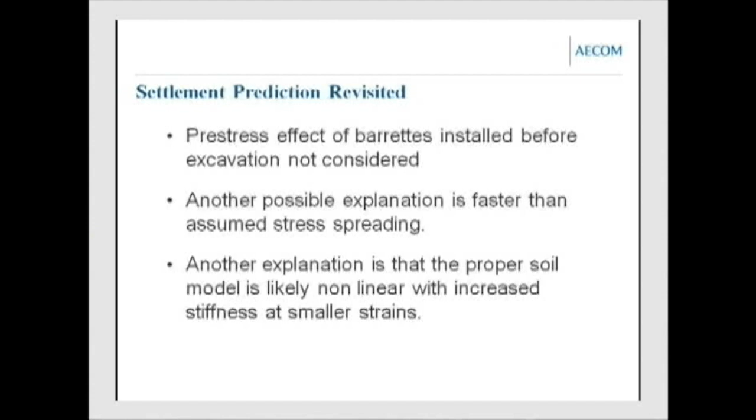Who says we got the right number? If you do the rigid block analysis with perimeter friction, you can come up with the real right number. Another explanation, probably one everyone can agree with, is that the proper soil model is likely nonlinear, with increased stiffness at smaller strains. Once you accept that, using an approximate modulus will overpredict the settlement by definition.

We've got just five minutes to consider the hindsight evaluation of a cost-saving foundation idea, which on this project could have saved millions—this is a multi-million dollar foundation system. Why not consider piles as settlement reducers, allowing much higher concrete stress levels and only slight increases in predicted settlement with reduced concrete cross-sections? It actually ended up being barrettes rather than piles, but designed the same way to keep allowable stresses in the normal range.

What happens if you do that? You get a little more compression in the rigid block, since you've got higher stress levels in the concrete, so you predict a little more settlement. But since you had a deposit where a mat alone could have worked, the only reason for putting in the barrettes is to control settlement. Our criteria said that for a mat-only design, you should have a factor of safety of 2—you probably have it here.

Why not do it? I think the answer is, that's for the next guy. If you go back to where we were at that time, we were right on the nose on the maximum differential settlement, and any increase at all would have blown our criteria—we would have been outside it. So I don't think if I'd brought this up 15 years ago they would have agreed. But today, I would bring it up and discuss with them ways to save millions on a foundation like this.

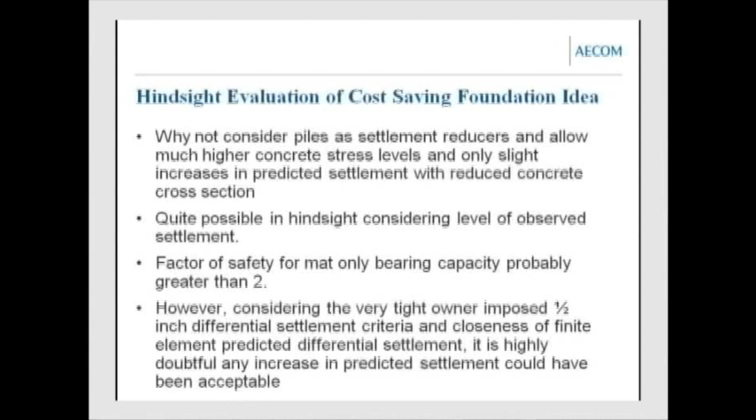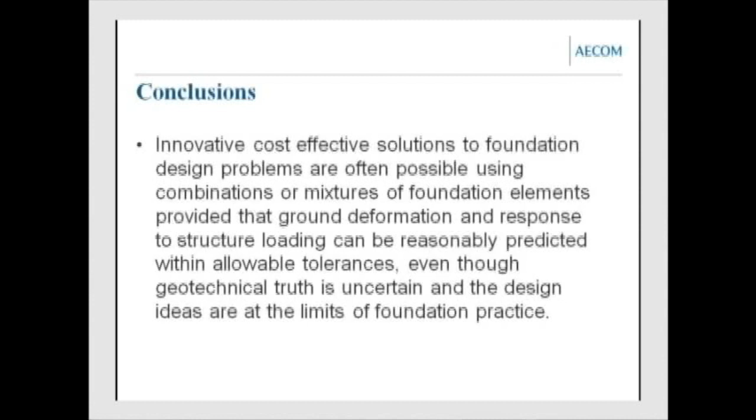Conclusions: I hope I've shown that innovative, cost-effective solutions to foundation design problems are often possible using combinations or mixtures of foundation elements, provided the ground deformation in response to structural loading can be reasonably predicted within allowable tolerances, even though geotechnical truth is uncertain and the design ideas are at the limits of foundation practice. The key requirements are geotechnical and structural engineer teamwork, knowledge of and experience with the local geology and past building foundation performance history, or being more conservative where such information isn't available, and having experience with use and interpretation of in situ pressure meter testing, or whatever method is used for predicting ground deformation under load in a particular geology.

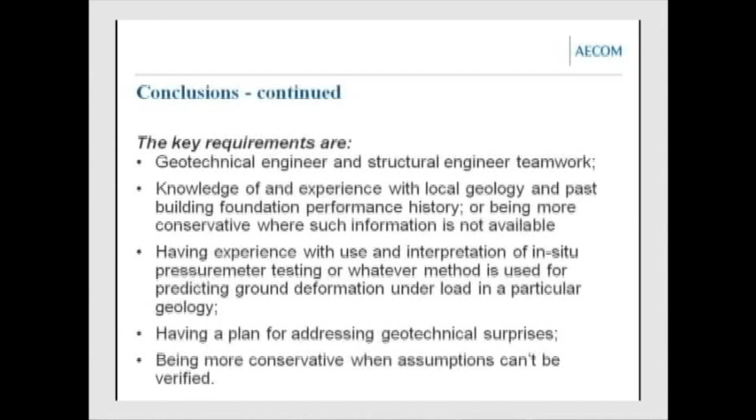We like the pressure meter, but other people like other things. Having a plan for addressing geotechnical surprises is a good idea, and being more conservative when assumptions can't be verified. Thank you.